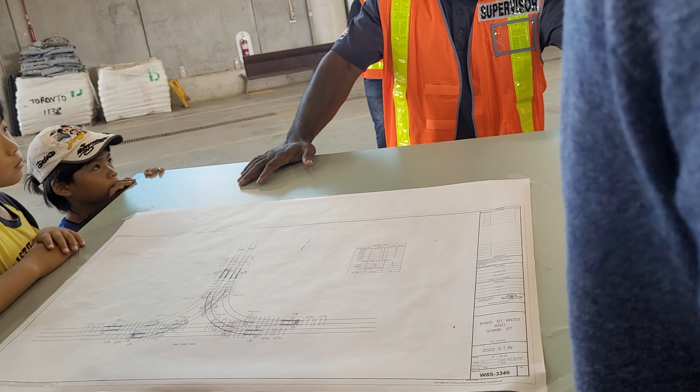That being said, questions, concerns? Nope. So I'm going to say this again. We take an hour or more, I'll say 2 hours, to bend a piece of rail to spec. Questions? Talk to me. Manual, but again, we go by the numbers. So every so often we go up, so we'd have to come down, measure, make sure everything is good.

Any more questions? Steel. Rust, yes. But what we do, we have a rubber encasement that we put on it, and we send it out in the field. So you see right here, if we put it down right here, we have a rubber encasement that we put on it. We make sure no water, we put silicone, all of that, so no water will get to it. And then we encase it into concrete, good to go.

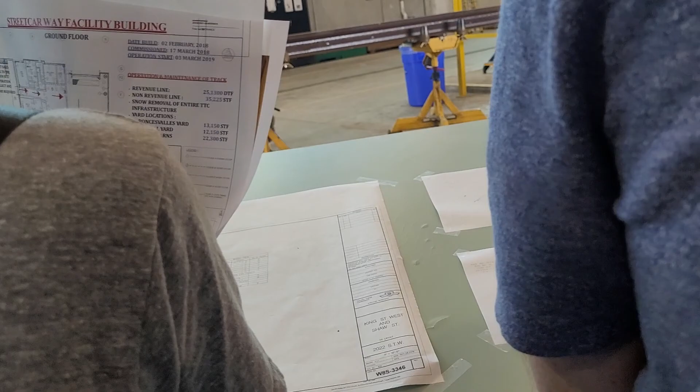How many do this from Canada? Yeah, I think it comes from Hamilton. And then travel it over by water, pick it up at the port, send a trailer, grab it, bring it here. It comes here by boat, not by truck on the highway? No, it comes by the boat. If you know where Cherry Beach is, it comes right here. To the Port of Toronto? Pull it off the port, and then we send the truck and trailer with a permit, make sure everything is good, and we transport it over.

How do you find out about broken rails? So I have engineers or my mechanics who would go out, or the streetcar operators. Once they hit it, they'll find that it's broken. They call it in. I send one of my guys out to investigate, make sure everything is good. Oh yeah, every time you go over a broken rail on the streetcar, you feel the bump, right? How often? Because you've got to look.

You have the weather play a big factor in Canada with the rails, the hot, cold. Then you've got to look at the electricity that runs through the top part of the streetcar. So all that plays a big part. So I'd say in the daytime, maybe you get a little crack here and there, but over time, if we don't jump on it, maybe it gets worse. And we don't want a derailment. We have a couple of those already.

Not nice, but it wasn't from the rails. It was from, let's say, a cement truck pushing one streetcar out. Somebody lodged something into the track. The wheels come out. That's not your fault. You can't control the people who drive cement trucks in the city. There you go. But we try to keep.

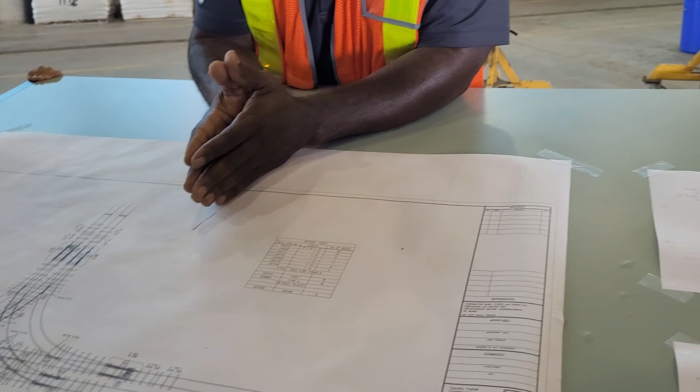Thank you. Do you guys use concrete ties or just wood ties? So, this is wooden ties, right? Anything in the open here is steel ties. There, steel ties. Here, we've got steel ties. Okay. Why do you still use wooden ties? Why do we use wooden ties? Because you gotta look at some of the areas, right? The wooden ties are better, right? So this is the track that's going in at King and Shaw, currently at King and Shaw.

Where there's no streetcars running right now. No, there's no streetcars there right now.

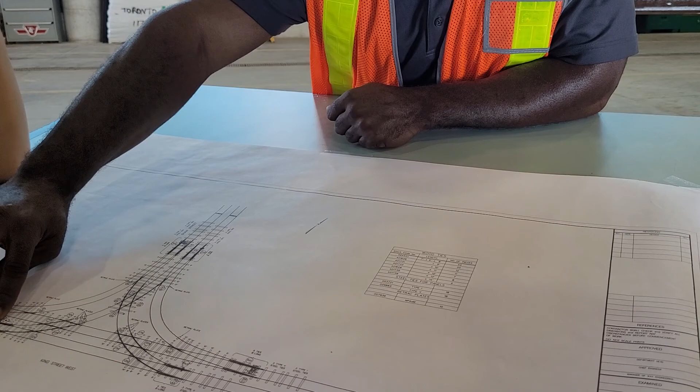One question: do you guys use double point or single point switches? This one is single. And what about this one there? That's single too, but look here - this is a manual switch, and this is an electrical switch. You see the component in the middle? That one can be activated by the operator in the cab.

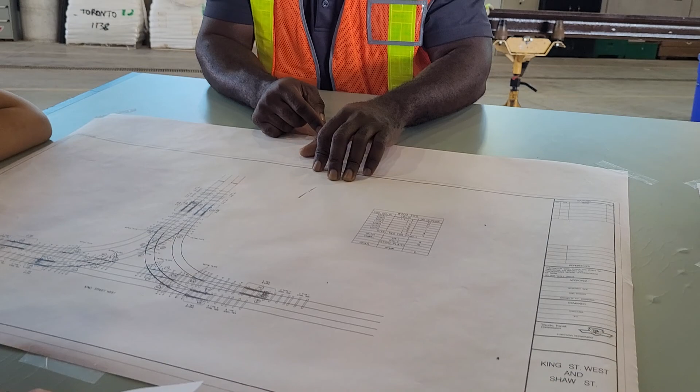They push it and go wherever they've got to go. He's got to come out with the stick for that one. But this one he doesn't have to, because if he's moving this way, going west, all he's got to do is drive and it'll flick open. If he comes from here, same thing, it'll open - because he can't go the other way, that's the wrong way.

In the subway they use a machine to throw the switch - same thing, they use a machine from inside for these ones too. The manual switches are trailing switches. The subways use the same electrical switch, but you can't drive over them when the switch is in the other direction.

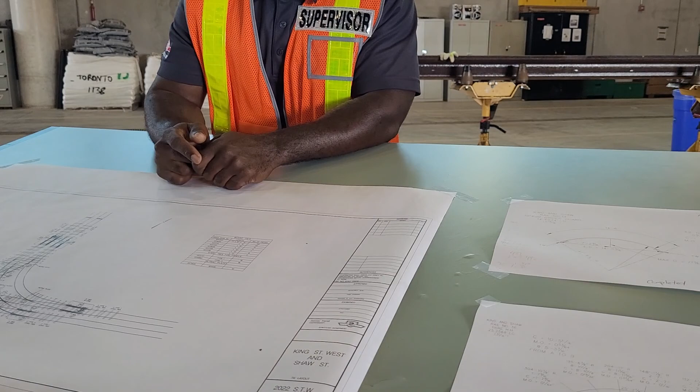No, you can't drive over them on the subway, same as this one here. You can't drive over them once they're in a set position. If you want to go in another direction, you've got to move them. So if you're backing up on this one, you're gonna have to flip it.

Why do you guys still use single point switches instead of double point? Isn't it double point they use on the subway? Double point we have at Leslie Yard. Leslie Barns we have double point, where the points slide together. Does it eventually move to double point everywhere in the city?

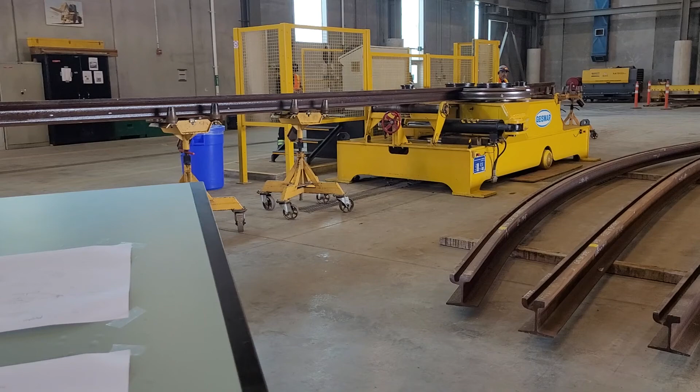No. It's garbage - it's not meant for the climate that we have over here. The full seasons that we get over here aren't meant for that.

I heard that double point would make the streetcars go over the switches faster, because they take single point switches very slow. You have to, because what happens if something gets lodged in there and you take it fast? With double point, you get a derailment - everything. But if you go slow, there's a possibility it won't happen.

Whereas at the subway you don't have other junk getting into the tracks. There you go - subways use it, but that's rare, because there's nobody else driving over there. Subways use a different type of switching machine that's controlled by the signaling system, so the thing doesn't... never mind, you tripped and fell.

In this case, the operator would have to come out, get his or her switch card, and throw it to the switch like this. If they want to go on a curve, go east or west, they would throw the switch like this, and then of course go east or west, then throw the switch back. If they want to go straight for the next streetcar to come, they throw it back.

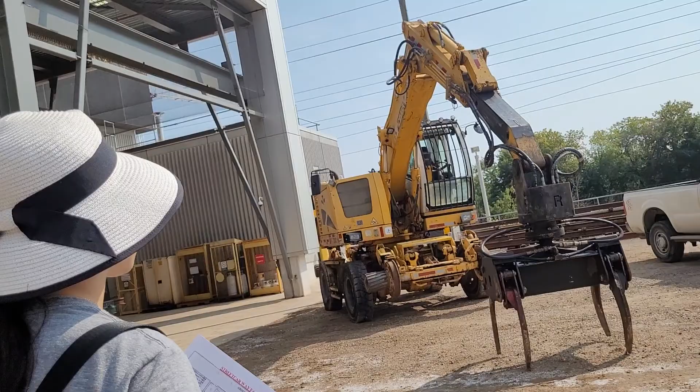Okay, so right here on your left, my right, is our Colmar machine. This machine basically picks up and goes onto any terrain we want it to go on. If you've seen the news about an SUV, car, or truck going into the Spadina tunnel or Union Station tunnel, this is the machine that takes out those cars. It has a high rail system that lowers down onto the rails, drives onto the rails, picks up the vehicle right by the roof, and brings it out with ease.

And usually that car is a write-off when it comes out from the machine. Yeah, just don't go down there in the first place. Because it's really hard to get out.

So getting to that one there - that machine is pretty old. That's the Geismar. It's just a sister to the Colmar, a little bit newer, but does the same thing. Picks up whatever it has to pick up, and can also go on high rails.

That is the milling machine. It mills any road surface like concrete or asphalt to help with track repair and replacement. It goes about 6 inches down, then another 6 inches to get about a foot down to the base for the rail. Then we can pull out the rail and put a new one back down, making it brand new.

And our snow crews as well - we do all the snow removal for streetcars, the streetcar weight facility, and streetcar stops. And that's one of our fleet there.